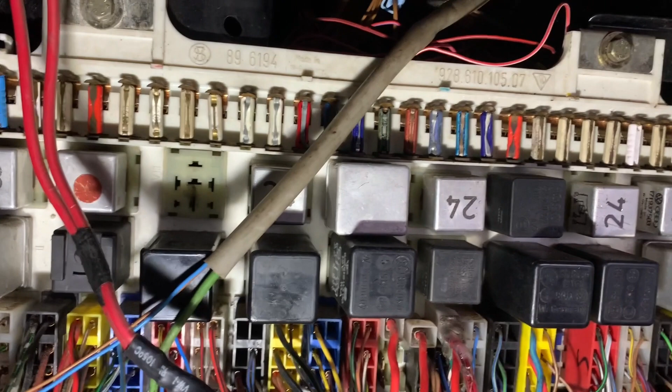So I have an 84, and I've got the lovely torpedo fuses. I'm going to just do this, take some pictures, and I've got the diagram, either way, just to make sure you know what size fuse goes in what location.

I'm going to leave the relays in place for now and do those later. I'm getting ready to head to Texas in the morning, and I don't have time to do anything other than just try and get these fuses cleaned up. I've got all brand new fuses, and then I'm going to take my Dremel tool and go top and bottom on the point of contact.

Then spray it down with my Deoxit D5, and then my gold - it's supposed to be some type of enhancement chemical that goes on it, and we'll go from there. If I have time, after I get all these fuses removed - I've never been a fan of the torpedo fuses.

Might be easier if I was doing it with one hand.

So far, I'd say most of them are pretty tight.

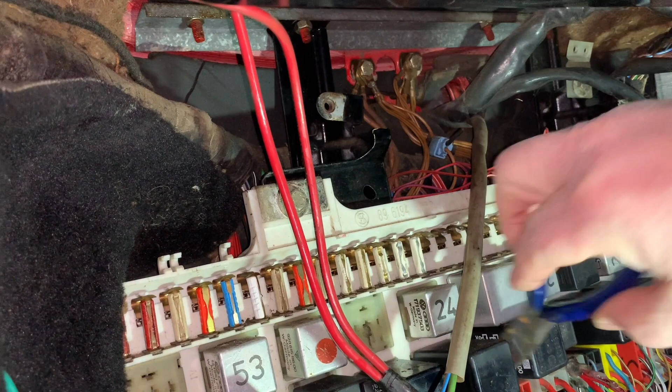I'm not a big genius videographer or anything. I'm just kind of doing this for fun, make the videos and post them, and some of them people have already made, so it'll just be kind of a chronicle for me on what I've done to the car. So there's that, and then I've also been amazed at some of the stuff that I haven't seen videos made for, and so maybe those will be a little more helpful to people.

I don't know how helpful it is to see somebody take all these fuses out. All that to say, where I was leading to with that conversation with myself, was that hopefully I can at least learn how the support function works on editing videos. That way I can speed up - I got them all, yep - speed up some of this process, so you don't have to sit there and watch me take 2 minutes to take out all these fuses. Of course, I guess it was only 2 minutes. Had a friend of ours that was a big YouTuber and marketing person, and they said you don't want your videos to be more than 15 minutes or you'll lose people. So I don't know if that's right or wrong, but anyway, they are all out.

Let's see if I can kind of zoom in. Can't tell for sure if that's any kind of corrosion or if that's just like a silver piece or coating. See if I can get the upper end. So that's what they look like.

What I'm going to do is go get my deoxit spray, my D5, and I'm just going to try it alone first and see how it does, just 'cause I'm curious, and then if not, I'll hit it with my brass wire brush.

All right, so there's my deoxit D5. It's a 5-ounce can, and we're gonna spray that down and see what things look like afterwards. I'll just do a few of them so I don't waste it.

Get a rag. Of course, I couldn't find a white rag, so I'll have to use a yellow one. Just a little bit of crud on there. Let me find a clean spot. Upper.

I don't know. I mean, there's some crud wiped off, but I'm gonna go ahead and hit it with the - it'll fit just perfect, so I'm gonna do low speed.

Kind of hard to tell for sure. Well, okay, yeah, so there's some that haven't been done. That one, I guess, kind of in the middle compared to the one to the right. So I'm sure it's doing better or doing good. I'm just going to go ahead and go through the rest of them, and the rest you can figure out, I guess, at that point.

All right, so it is a 10 mil. Break that loose.

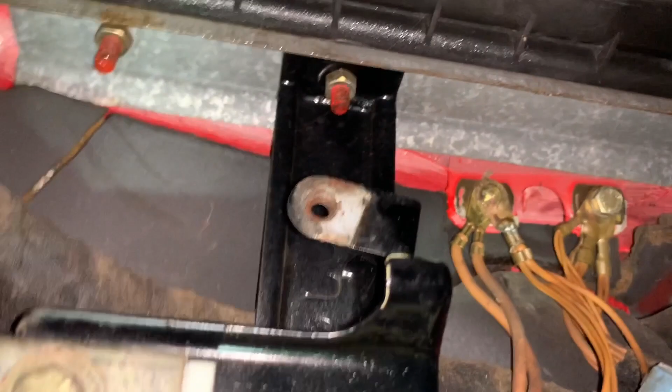So I can get it off. Okay, I got the first one out, and it's got 1, 2, 3 ring terminals that could be cleaned up. That's not too bad on that, I don't think. But the terminals could be cleaned up, I guess. Let's do that next.

Alright, so took the 2 ground points off, cleaned each individual ring terminal. There's like 7 of them all together, I think. 3 on one and 4 on the other. But anyway, at the mounting point I sprayed it down with the DeoxIT D5 and then also the G5 gold, and then tightened them down.

Now I'm gonna go and place all these fuses. So I found my diagram. All right, so...

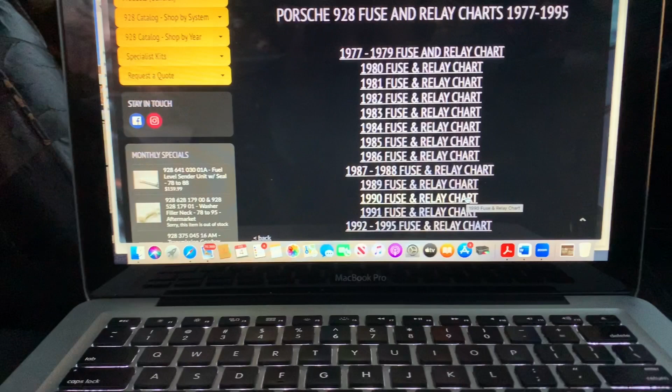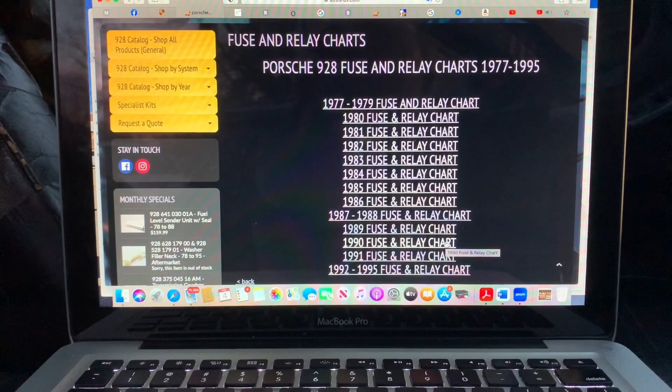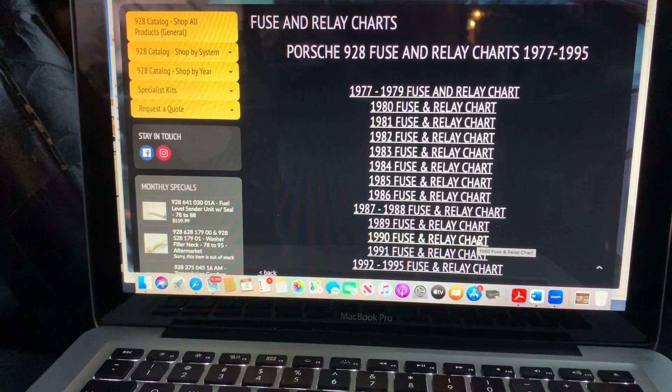Part of the reason I did this today is because I had to replace my battery. We've had a cold snap here, and it had like 3 volts on it when I came out here today. Even with the tender on it, it had failed, and it's only a year-old battery. Anyway, one thing I thought was interesting today that I learned is how much heavier the gel batteries are than the lead acid batteries. Holy moly, it was probably significantly heavier than my other one.

So anyway, onto these fuses. I just wanted to make sure that you knew that I don't have the battery hooked up. That's why I'm doing this right now today, because I took the battery out to go replace it.

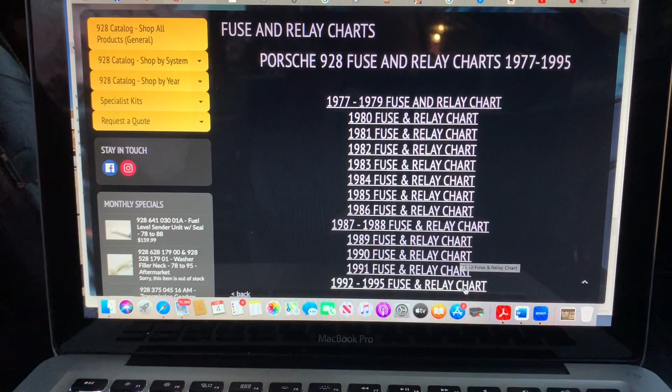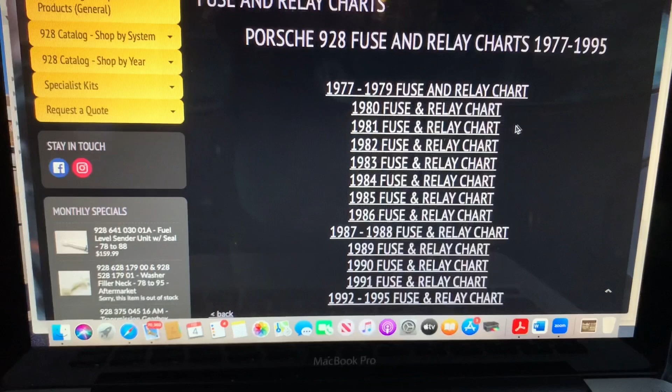So I am on 928RS's website. Thank you to them for having this information on here. You can get on here, 1984 fuse and relay chart. Once my driveway Wi-Fi finally kicks in, there we go. So this will tell me what size fuse in each of my fuse locations for my car. And you can see on that previous page, they had just about everybody's every year on there. So you select your year and then you go on here.

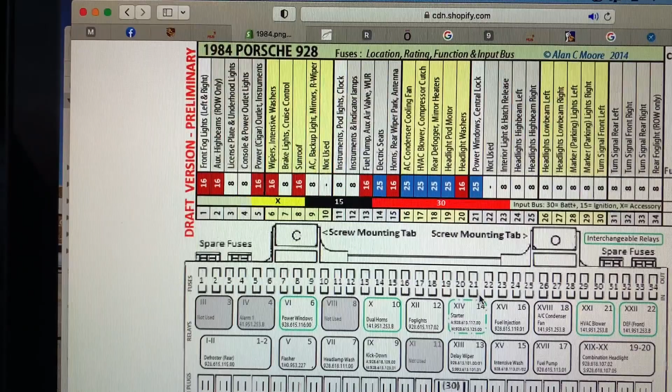So mostly 8s, some 16s and some 25s. So I've got brand new fuses. I'm not gonna film myself putting the fuses in. I'm sure everybody here is capable of putting one of these torpedo fuses in. Sometimes it's just a pain in the butt getting them in right, and not having them fling out on you or drop them, so I'll save you the embarrassment of that for me.

And I will go ahead and get all the fuses put in according to this chart, and we'll go from there. All right, well...

I've got 8 in so far. It's taken me about, I don't know, maybe a half hour to get the 8 in. It's been a while since I messed with torpedo fuses, and they're every bit of a pain in the butt as I remembered them being for my 911s. Actually, even more so, because at least in the 911 it was underneath the front bonnet or hood, and you could get in there and actually reach it.

This is a lesson in ergonomics on this one. Maybe yoga poses. 928 fuse change pose is a new yoga move.

So yeah, I got a couple things I was just gonna point out, which I knew ahead of time when I did this, but order extra. I ordered twice as many fuses as I needed for the panel, that I knew I had slots for each size. Because inevitably what happens is when you're trying to put them in and you get kind of twisted up, you can actually twist the metal off of the tab or the top or end cap, whatever you want to call it. It is useless, so you got to be careful. But they'll have a tight fit, though they are a pain in the butt to get in there, so give yourself plenty of time.